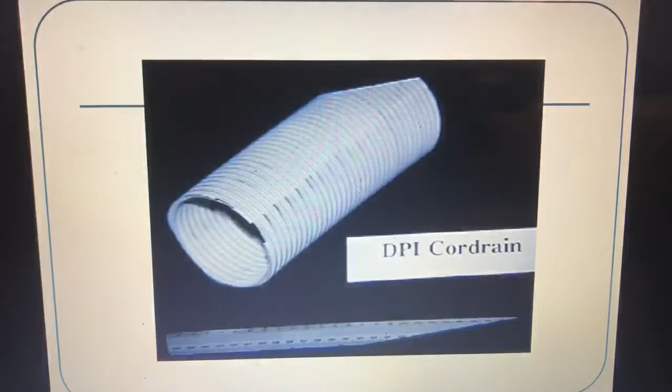The first kind of pipe we are going to look at is corrugated plastic, or Cordrain. The most important thing to know about Cordrain is that it's light and strong, and you have 4 different sizes you can get them in: 65, 90, 110 and 160 millimeter diameters. Here's a picture of Cordrain. What's important to remember is that you've got these ripples on the outside as well as on the inside, and that makes it strong.

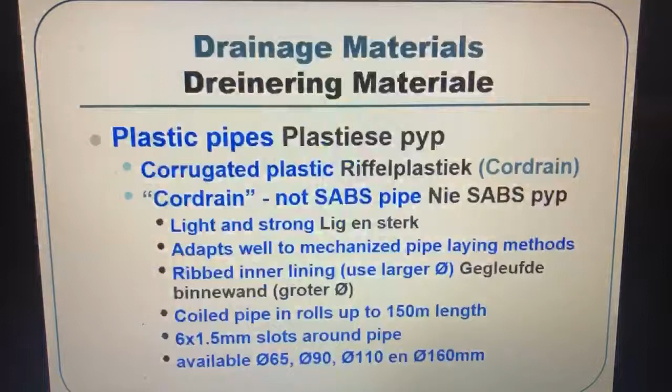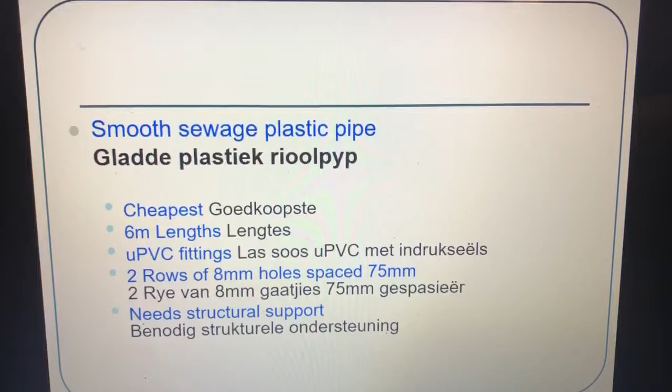Next, smooth sewage plastic pipe. It's the cheapest, but it needs structural support, so it's not as strong as your Cordrain. As you can see here, it is completely smooth both inside and outside, which makes it not as strong as the corrugated one, but it is very cheap.

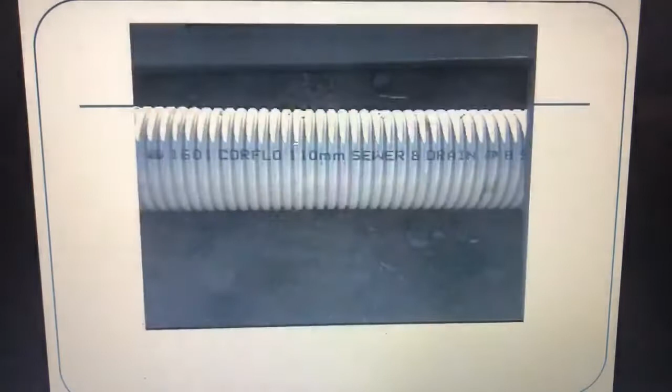Next, UPVC sewage pipe, which is smooth on the inside, and it is more expensive, but very durable. This is how it looks on the outside - you can see it's corrugated on the outside, but on the inside it is smooth, so not too much friction when the water moves through it, but it is strong because of the corrugation on the outside.

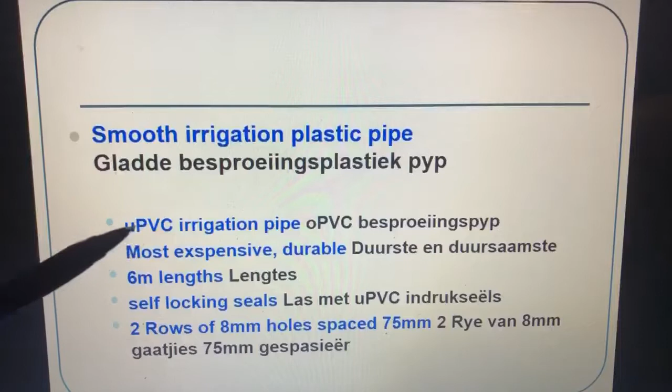Fourthly, smooth irrigation plastic pipe. This is UPVC irrigation pipe, very expensive and durable, and it has self-locking seals, like you can see there.

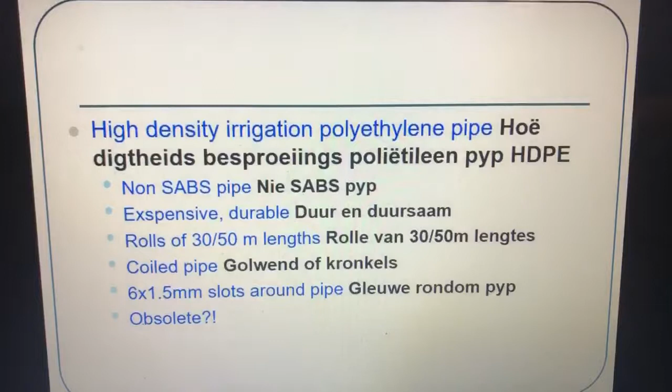The last one is your high density polyethylene pipe. This is also expensive and durable. It is a coiled pipe, in rolls of 30 to 50 meter lengths, as you can see there. So that's just the different kinds of pipes that you can get.

Then your filter material. Why is filter material so important? Because it prevents soil particles from being washed into the pipe. You can imagine that you have a lot of sand and silt around your drainage pipe as soon as you've installed it, and so having a lot of filter material reduces the ability of the sand to wash into your drainage pipe.

It also reduces entrance resistance to flow and provides structural support. Especially if you've got weaker material for your pipes, your filter material can help to keep your pipes in place and make sure they have physical support.

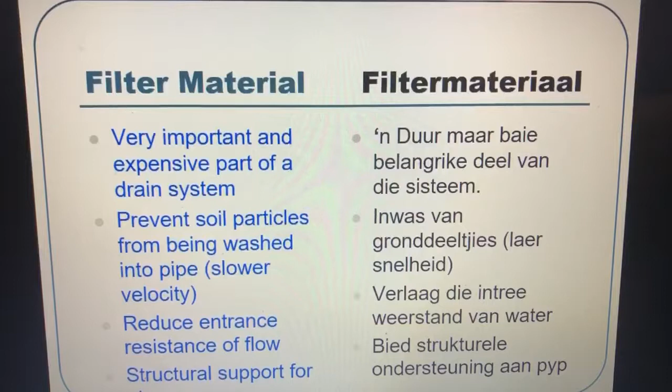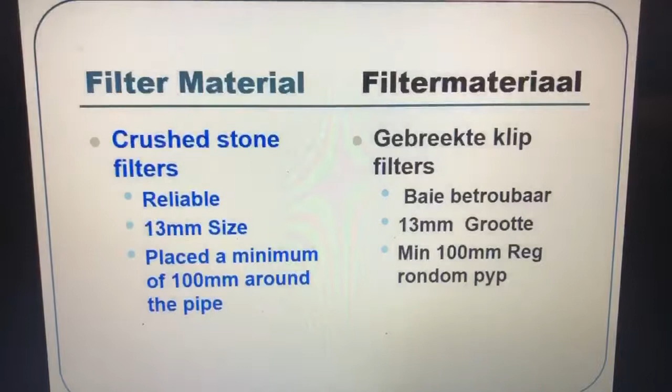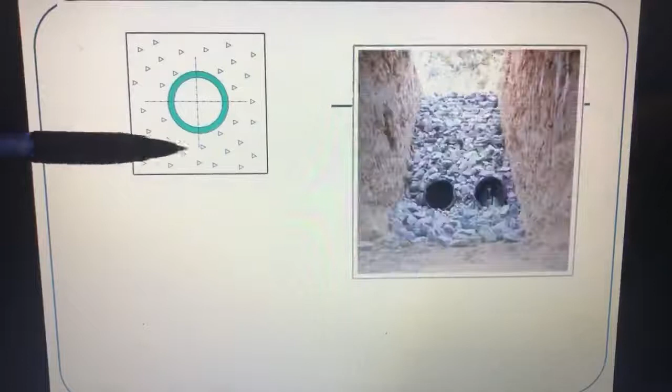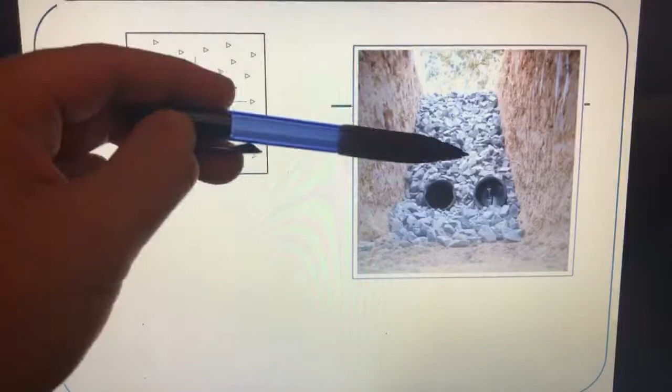The most important kind of filter material is crushed stone filters. Usually you'll have stones not bigger than 13 millimeters in size placed around your pipes - this is your pipe with a lot of these stone filters around it. Because you've got all of these stones, this decreases the rate at which the sand and silt can flow downwards to the pipe, so you don't have excess sand etc. that ends up in your physical drain pipe, because that can cause blockages.

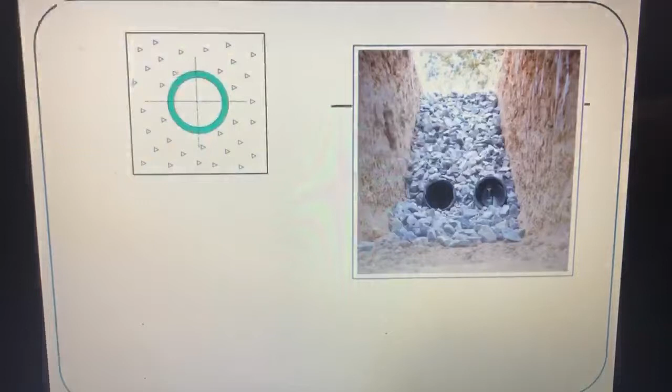Then you have access pits. Access pits are placed usually at turns in your drainage pipe, or a maximum every 200 meters, usually every 100 meters, and they are placed so you can inspect your drainage pipe, trap silt that can end up in the pipe, and provide access for maintenance. If you want to clean your drainage pipes, this is usually where you would get in, climb in, and clean your drainage pipe from these access pits.

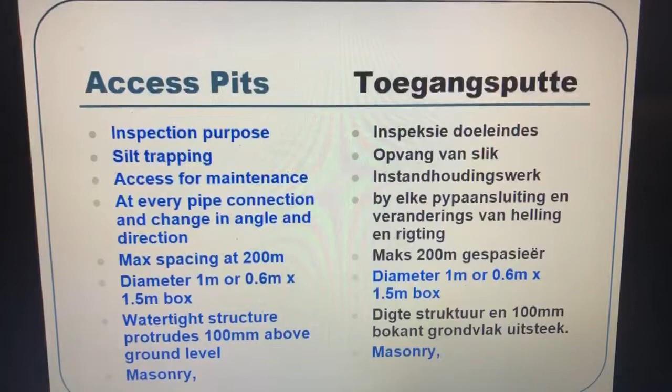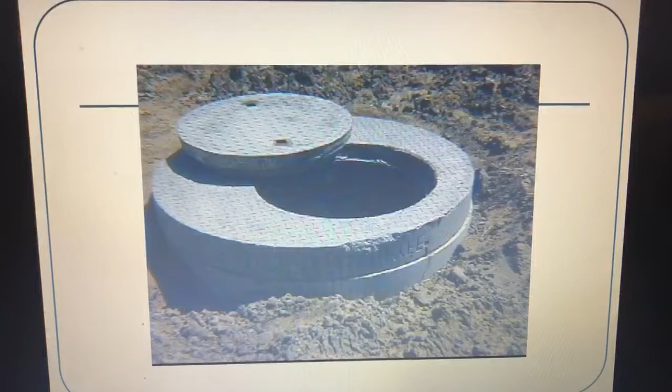They're usually in size and diameter of 1 meter or a 0.6 by 1.5 meter box. They are watertight, so that when it rains or there's a lot of water moving down the slope, the water doesn't fall into the access pit. That's why they are usually a distance of about 100 millimeters above the soil floor.

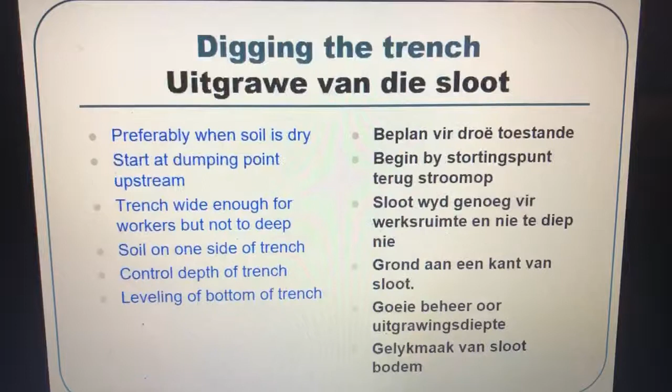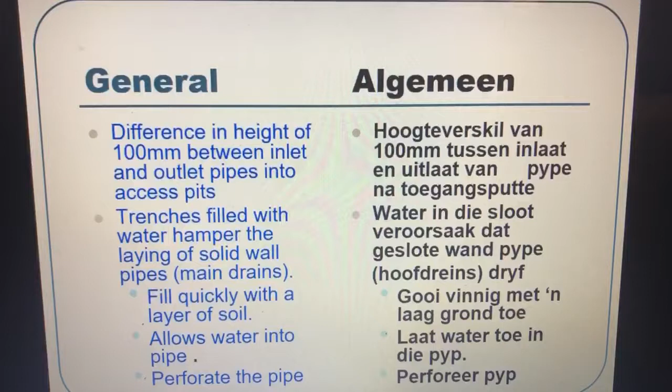Then this is just a practical guide to installing a drainage system - a practical guide to how you are digging the trench, how to lay the pipe in the trench, and then just some more general rules when it comes to drainage and installing drainage.

Be careful for collapsing trench walls while you're busy digging your trench. Make sure that these trench walls don't collapse, because that can cause sand to end up in your drainage pipes, and your pipes in clay must not be covered with plastic.

That is especially for when you have a very sandy kind of soil. Sometimes you'll put plastic over your pipes so that the sand doesn't end up in the pipe itself. But when you have an impermeable layer, usually you don't have plastic over pipes above your drain.

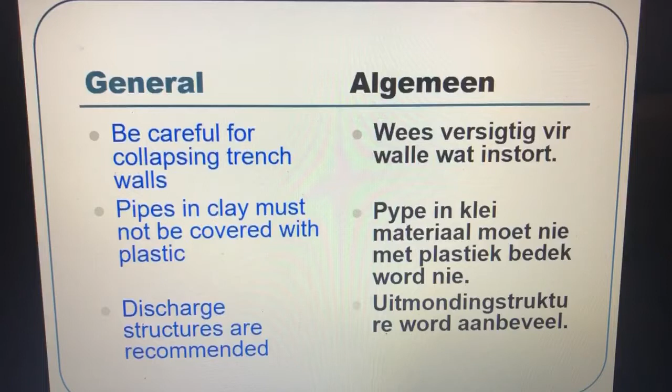Maintenance is a very important part of having a drainage system. It's important to do the right maintenance to make sure that your drainage pipes work correctly for a very long period of time, and that you don't have any issues with waterlogged soils. Blockages in the system may be concealed for a while, but harm can be done to your crop by the time a wet spot is detected.

When your drainage pipes are blocked, usually that will lead to water in your soil not draining out through those pipes, and very wet, waterlogged conditions can occur around the pipe that is not working correctly or being blocked. This can cause a lot of damage to your crop, because it takes time for you to realize there's a wet spot in your field. That's why just looking at the flow at the outlet of your pipe doesn't usually give you a good indication of whether or not the system is blocked.

Another thing you can do is look at the water table, because if your water table isn't staying low and it's continually at a very high place, then that is also an indication that your drainage pipe is blocked.

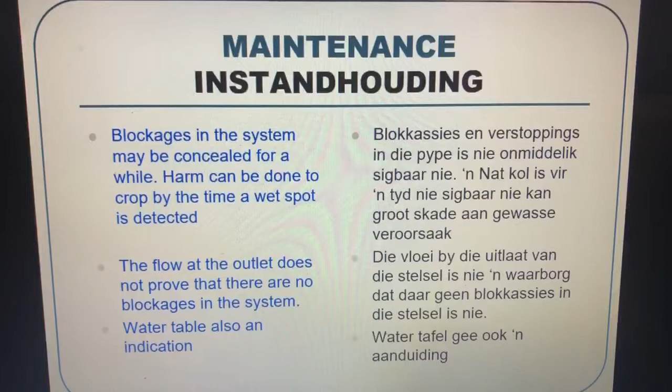Sand and silt are usually found in your drainage pipe, and they can cause blockages, especially in the first year or two after you've installed the drainage pipe. This is just because of the installation process, as well as the pipes lying around your soil - sand can end up in your drainage pipes while you're busy installing them.

Usually in the beginning there will be a lot of sand in there, but later on, if you still have a lot of sand and silt coming out of your pipes, then there can be a bigger issue. So it's important to clean the access pits every year to make sure that you are aware of any extra silt coming out of your drainage pipe.

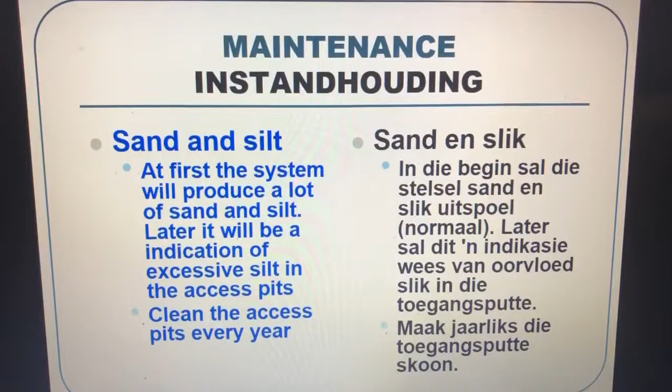Roots are a very big problem in areas where you have a wet season and a dry season, because roots always grow towards a place where there's water. So if you're in a dry season, the roots will grow towards the drainage pipe, especially the area around it, because there's water there, and you can have roots end up in your drainage pipe and cause blockages.

Especially if you are growing trees for wind, or to block off wind from your orchards, those trees usually end up with their roots in the drainage system. So then either you need to cut off those roots or remove the drainage system.

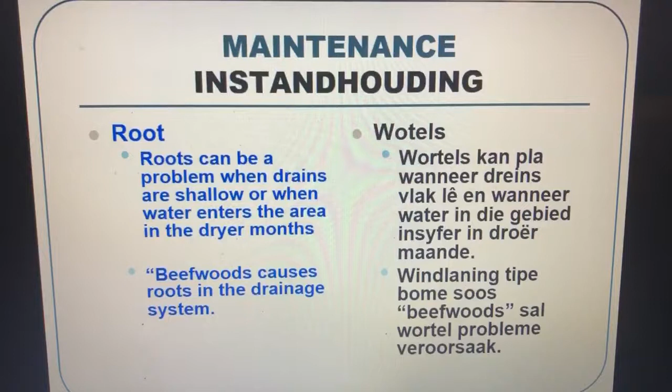Another issue is iron oxide. What happens is the iron binds with oxygen, it oxidizes, and forms this slimy yellowish-red deposit. This deposit is usually very hard, and so it starts blocking your pipes.

This is especially when you're using foliar fertilizer in your drainage or field, and that ends up in the drainage system. You should either scrape it out, or use sulfur dioxide to chemically bind with the red yellowish deposit, and that will clean your drainage system.

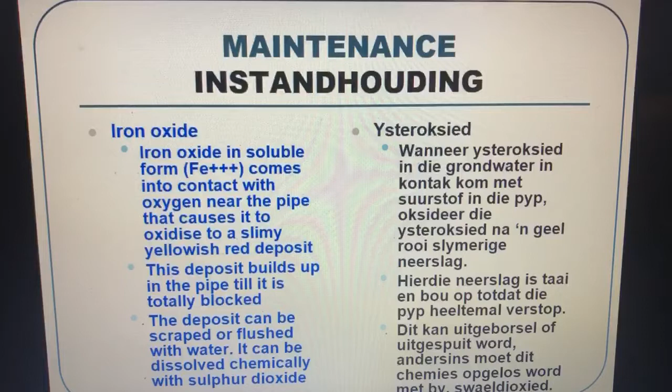So how do you clean your pipes? There are three main ways to do that: flush it with water - a jet of water that's really strong, under a lot of pressure, which can remove silt and dirt.

Then sewer rods - they can clean up to 100 meters of pipe, and that's why it's important to have access pits at every corner in your drainage pipe, because you can only clean in a straight line or straight drainage pipe. Whenever you have corners or bends, you cannot reach another area after that with a sewer rod. So it's always important to make sure you have enough access pits to get down into your drain and clean out your drainage pipes.

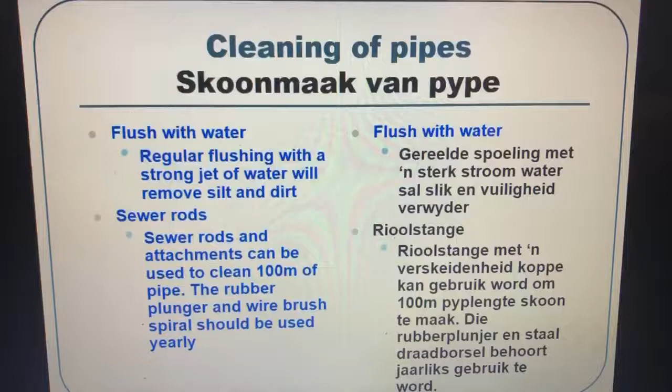And then lastly, high pressure equipment. They are more expensive than sewer rods, but you go through cleaning your drains a lot quicker, and you need a lot less labor to clean with high pressure equipment.